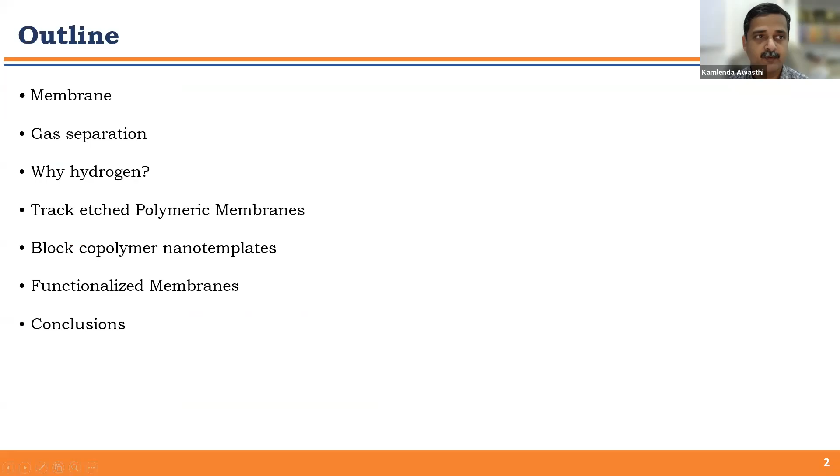So today I'm going to talk about polymer nanofilters. What are the challenges and applications for this, particularly for energy applications in hydrogen?

So if we see our day-to-day life, from morning to evening, for different life applications we are using filters also, like when we are having tea and other things during daytime. But have you thought why we need different filters for different applications? So maybe one common solution is because of the size difference. It means we cannot use a single filter for various applications. So we need some kind of filtration that is based on size.

So what is the size of gases and how we can overcome the challenges? This is just the overview that I'm going to present in this talk.

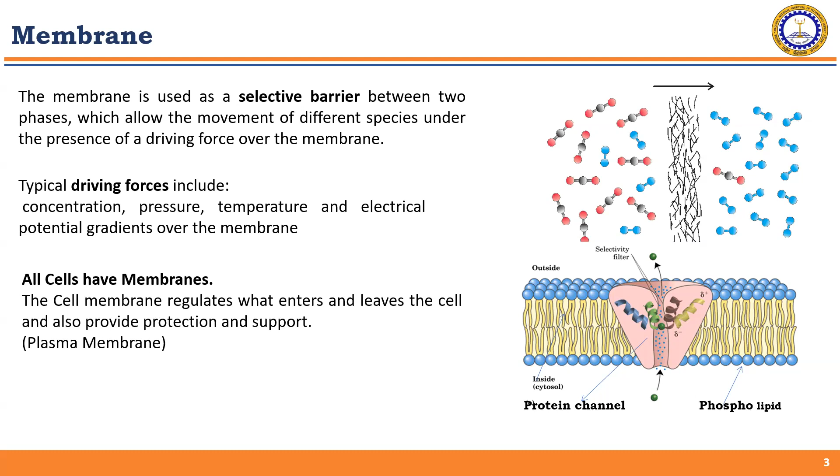So this is the example of protein channels, and these are the phospholipids here. So can we mimic the similar thing in synthetic membranes or in polymer membranes, so that they can allow only one gas to pass through and block another? So the idea is to mimic such properties in the synthetic membrane.

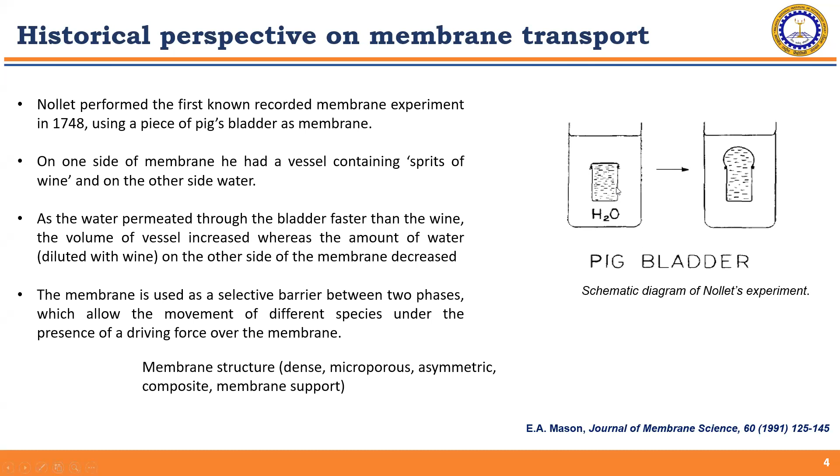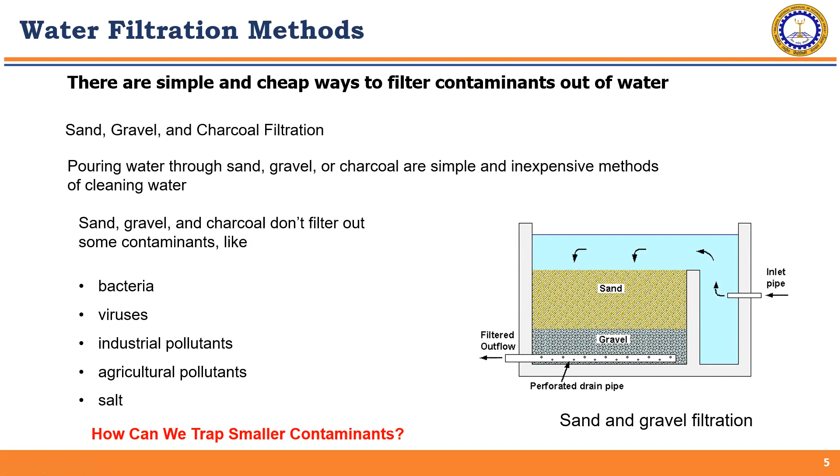This water that is coming out has bacteria, viruses, some pollutants and salt. Why? Because these sands or the gravel are not basically absorbing or selecting particularly this bacteria and virus to flow throughout this permeate water.

So what are the other applications in our daily life? Human skin. We filter hot tea using a mesh filter. There is a filter in a juicer which filters fruit slag. The water you drink is almost certainly filtered to remove more.

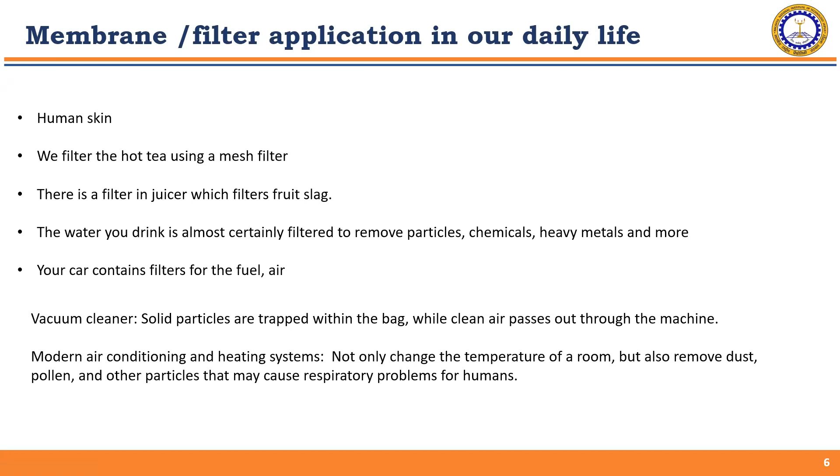And your car contains filters for the fuel and air, and vacuum cleaner. So if you see this filter, it means there is something according to their size, and either we want to have based on size, or we want to go for binding.

So it means there are different types of membranes according to size or according to their nature. Their structure may be dense - dense means there is no porous structure, but they have some internal free volume. There's also microporous membrane, and a layer that is supported on another porous layer. I will discuss this example in my coming slides.

Membrane material we can have from polymers, metals, ceramics, liquid membranes. But today I'm only focusing on polymer. So why polymer, not the others?

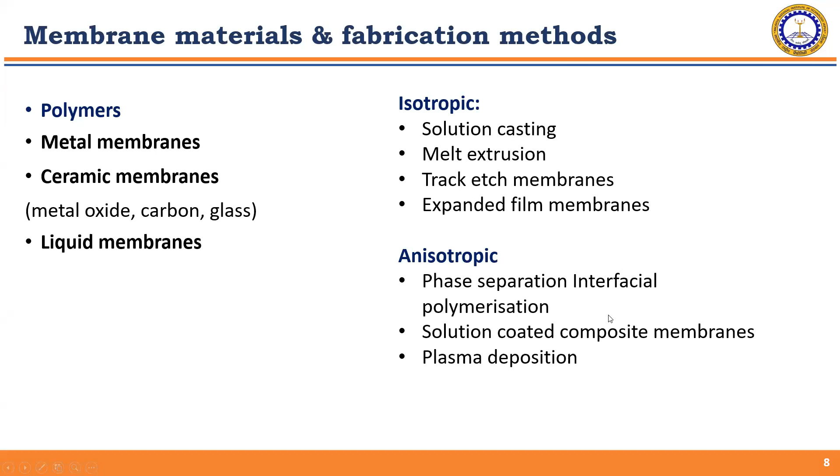Because once we have a membrane from polymer, this is flexible and has some other advantages, but we can certainly modify its properties according to our application. These polymer membranes can be made by isotropic methods, meaning solution casting, and so on, and anisotropic phase separation and other methods. I will discuss all these methods in my coming slides.

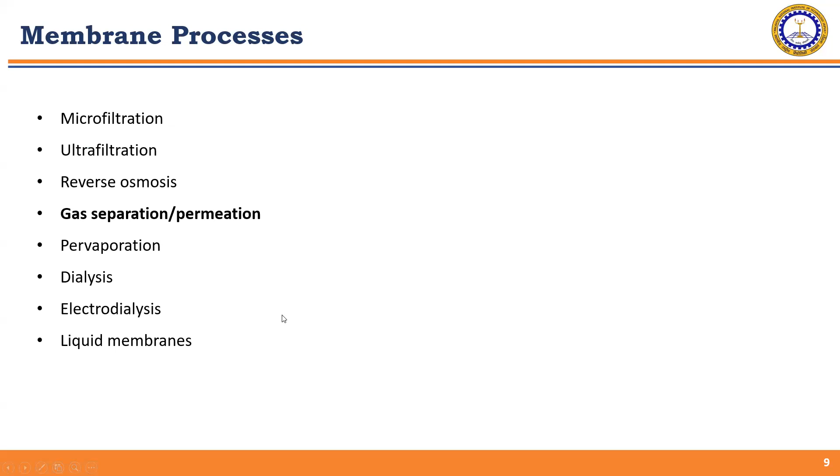And these membranes have various applications like microfiltration, ultrafiltration, RO membrane, gas separation, dialysis, electrodialysis, liquid membrane, and so on. Today I will just cover this gas separation part, not the other applications.

But at the same time, when we are decreasing the porosity, we are going for a narrow pore size distribution, the cost of membrane is increasing. And after a certain time, we have to change the membrane, meaning the life also. So if the porosity is very narrow, there's one problem - the life of the membrane, and second, the cost of the membrane.

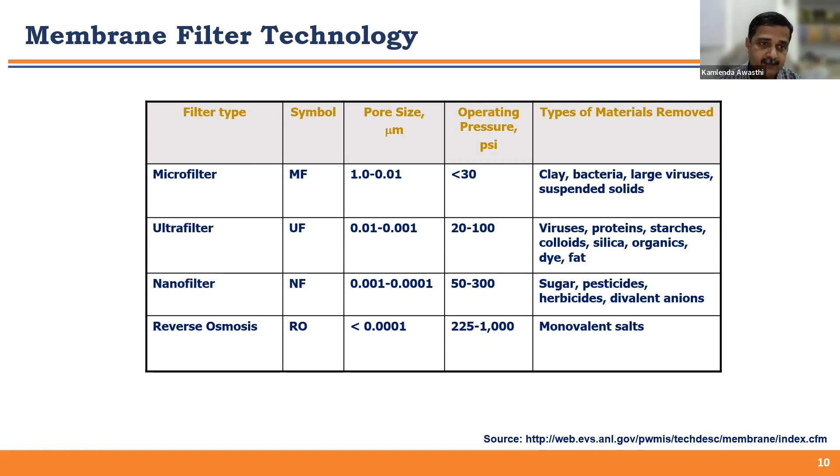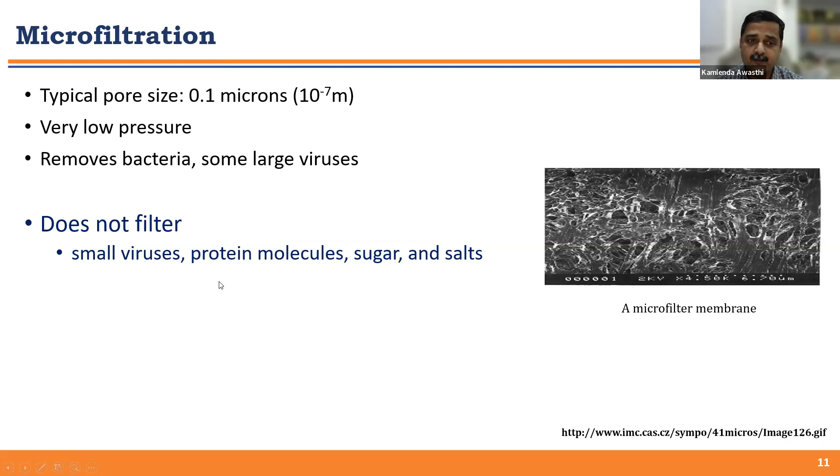Okay, so let's see. In microfiltration, as I discussed, the pore size is near about 0.1 micron. It needs very low pressure, but it can remove bacteria and large virus. But for small viruses and protein molecules, we need to go for this ultrafiltration membrane, where the porosity is near about 0.01 micron. But again, it does not filter ionic particles, lead, iron, and so on.

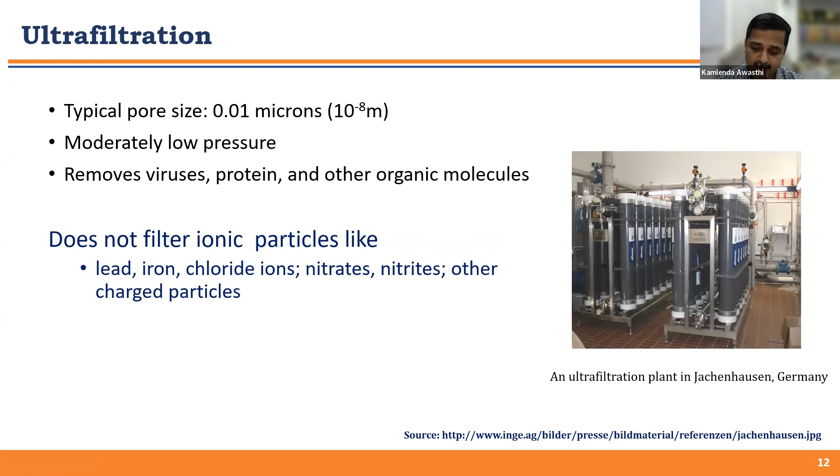So we need another kind of membrane. Then we come to this nanofilter, which almost removes the toxic or unwanted iron or lead, whatever is not possible with ultrafiltration. But the salt or the monovalent ions cannot be filtered by nanofiltration. Then we need, of course, this RO membrane that we typically use in our home for getting this water.

So here the pore size is very small, 10 to the power minus 10 meter or 0.0001 micron. If you can see, generally after 6 months or 1 month, we need to change this filter. And of course, it needs very high pressure when we are operating with this membrane.

So how can we keep large particles from fouling a membrane with small pores? This is one challenge - how can we do this? One possibility is we can use a series of membranes, so that larger particles can be filtered out at one level, and second and third and so on.

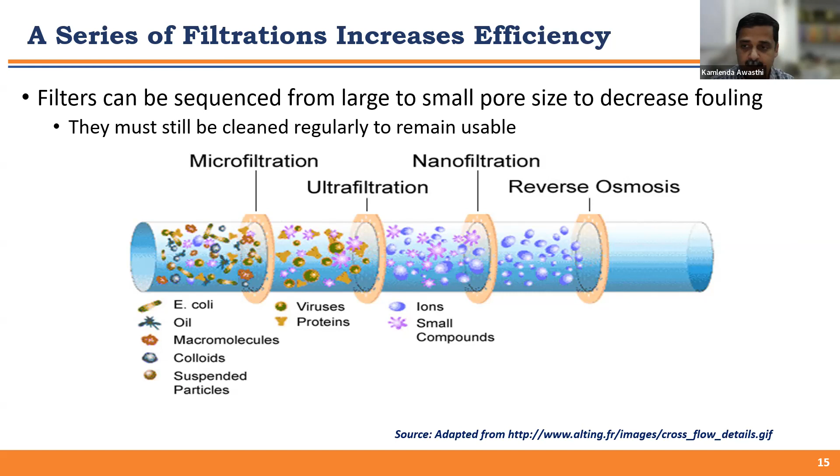But again, the size of your module and the cost of module, this is again very high. So this is not a good idea to use all membranes in a series.

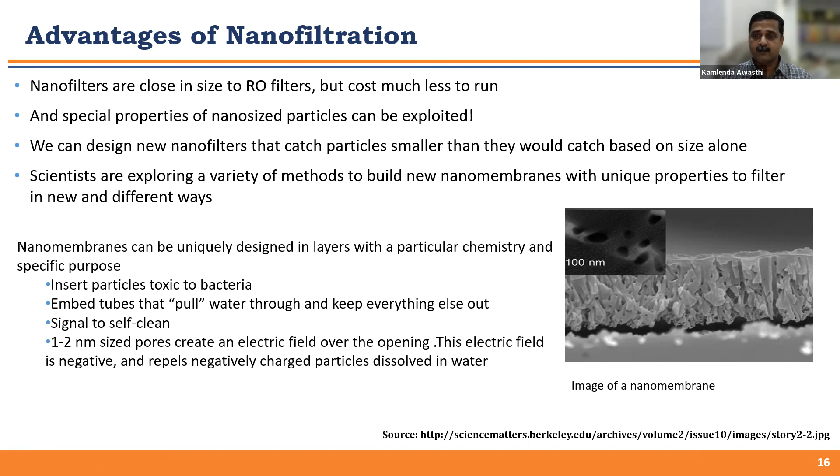Okay, so this is another example of what we can do in nanofiltration. Nano membrane means 10 to the power minus 9. They are very close to RO membranes but have less cost. So what we can do is decorate these channels with other particles, meaning we can design a new nanofilter membrane so that it can catch particles, or we can insert particles into this membrane that are toxic to bacteria. So here it gives an idea: can we make a nanocomposite membrane so that it has similar properties as RO?

Okay, so now today I'm going to talk about gas separation. Why this gas separation? In particular, we need hydrogen and nitrogen separation, basically in ammonia plants, hydrocarbon separation in petrochemical applications, CO2 and water removal from natural gases, and organic vapor removal from air and nitrogen streams.

So we are using polymers for gas separation because they have low investment, low weight, flexibility, low cost, and high surface area. And those cars that run on hydrogen fuel emit water, so again, no pollution.

So why are we interested in hydrogen? Because membranes may be useful for purifying hydrogen due to their low capital cost, compact size, and easy operation. And in fuel cells, there is one component that has this impurity in hydrogen. So how do we get pure hydrogen for this fuel cell application?

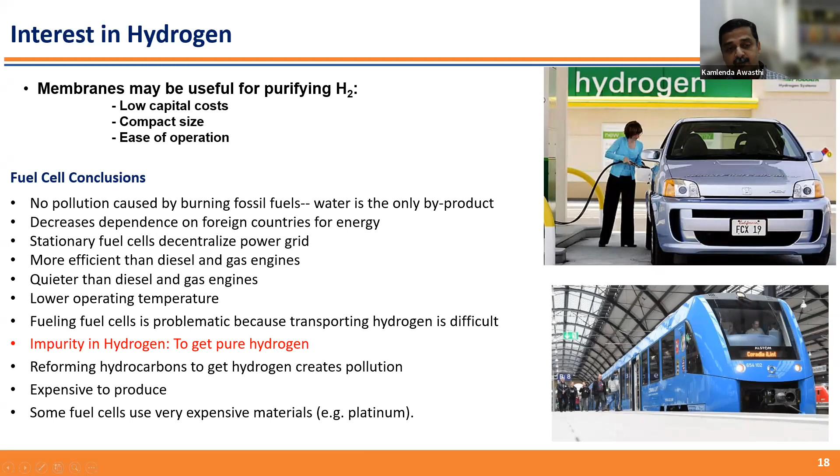But at the same time, if you see the kinetic diameter of the gases: hydrogen 0.28 nanometer, CO2 0.33 nanometer, nitrogen 0.36 nanometer. Their kinetic diameters are very close to each other. So we cannot make a filter of, say, 0.289 nanometers so that only hydrogen can pass and others are blocked, because whatever I'm talking about right now is basically in the range of nanometers. So suppose I say 50 nanometers, 60 nanometers, 70 nanometers, you'll see every gas passes through comfortably. So how do we make a selective nanofilter so that we can separate these gases?

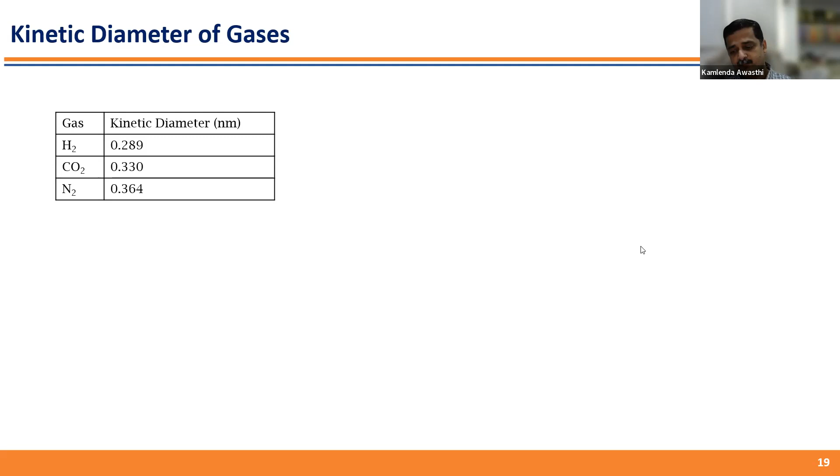So certainly we can make polymer composites and other membranes. When we talk about a membrane, an ideal membrane should have high flux in terms of high permeability, should be thin, have high selectivity, be mechanically stable, and should be reproducible when we talk about industrial scale, and of course it should have low cost.

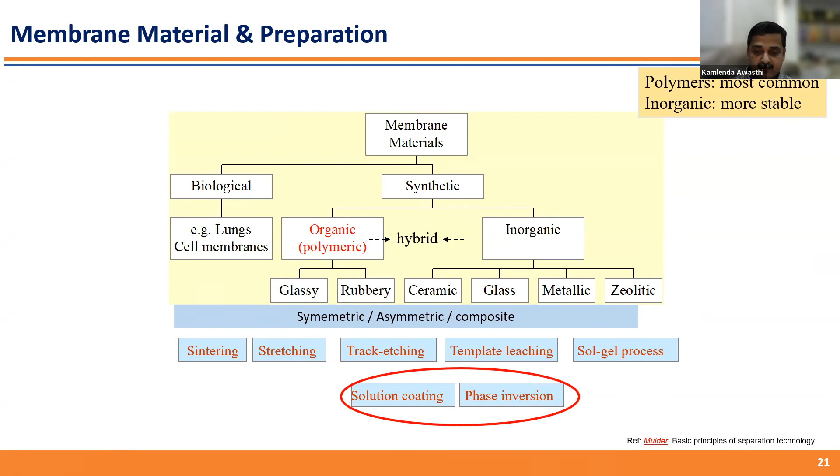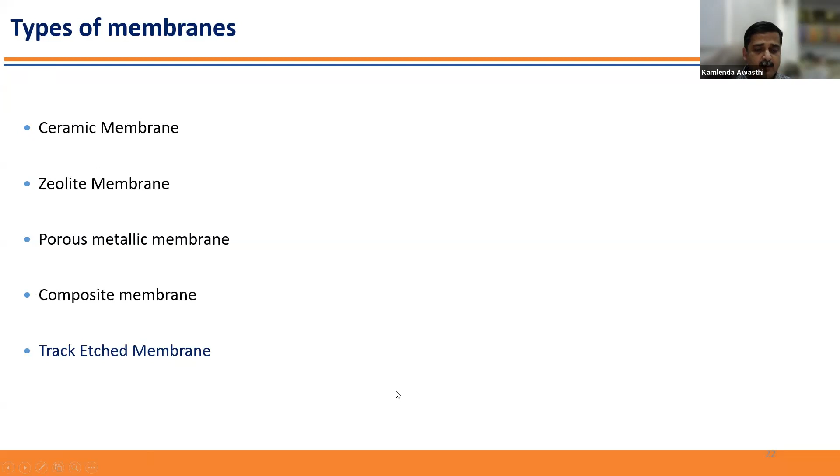So at last, solution coating and phase inversion are two popular techniques being used for making membranes. Again, based on the material, we can use ceramic, zeolite, porous metallic, or composite. But here I'm talking about track-etched membranes because here you have freedom to choose the porosity and pore size. These are the membrane preparation techniques: stretching, track etching, template, sol gel, phase inversion, and coating. And of course, further we can have some modification or engineering in any of these membranes.

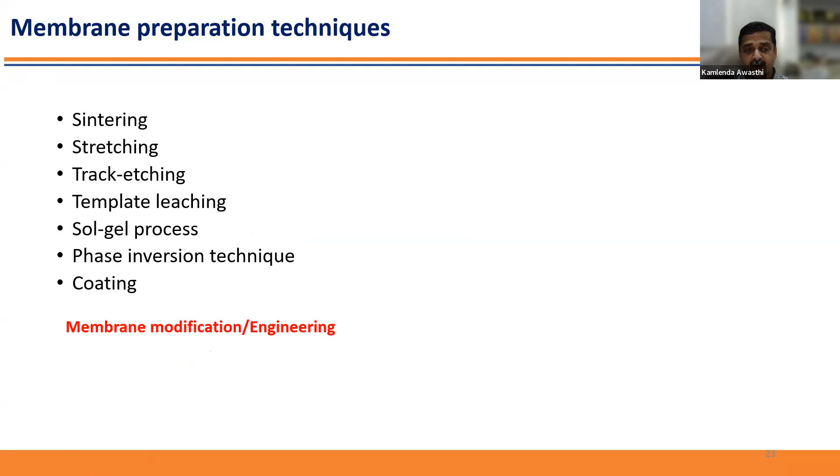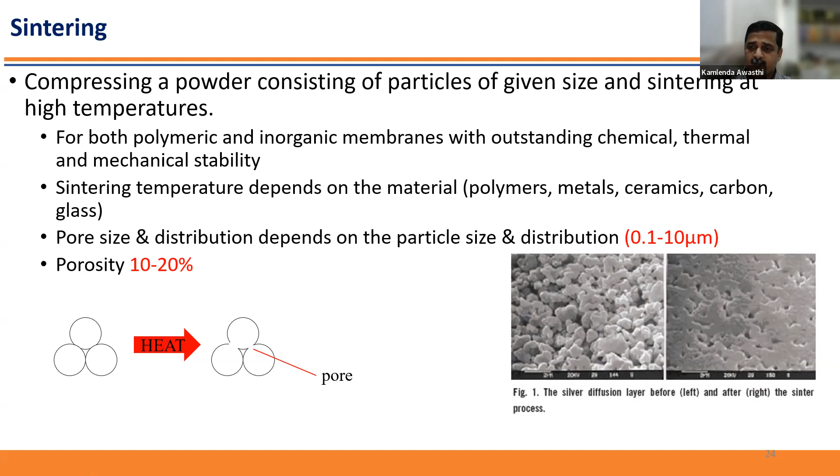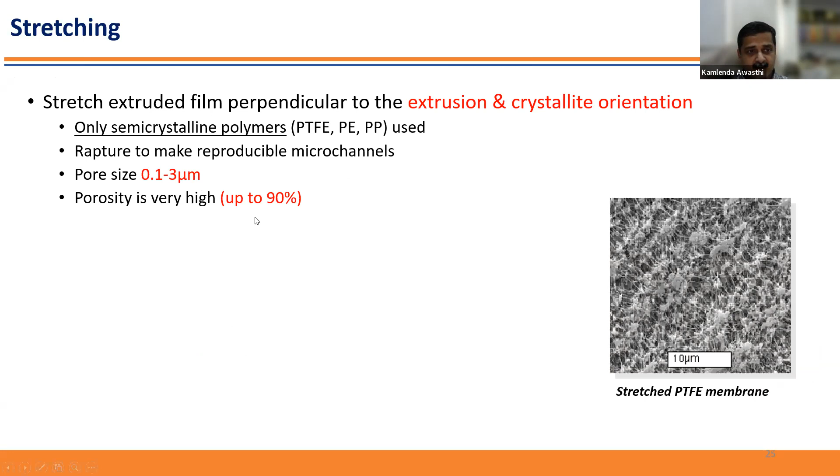Porosity is very high because pore size is very large here, so the phase inversion technique can also be used to make this asymmetric membrane. Here we have a solution of polymer in a poor solvent prepared at high temperature, and when we transform into the final phase, there is a sudden drop in temperature so that the polymer precipitates, and then the solvent passes out. This is basically simple, but again, there are some constraints in using this phase inversion technique, such as precipitation by solvent from vapor phase and so on, and we can have immersion precipitation.

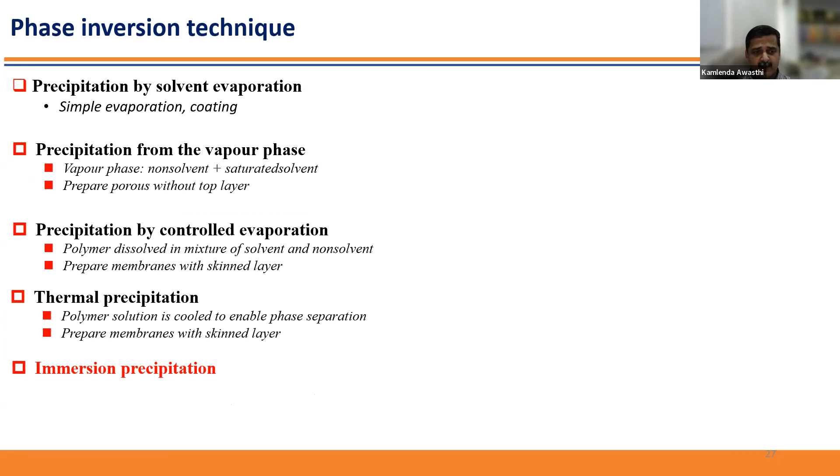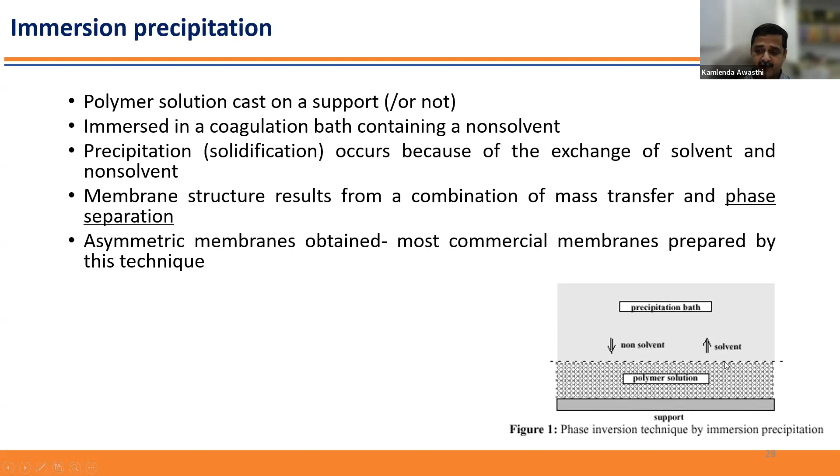So here you can see we can have support, and this is polymer solution. We can have non-solvent and solvent, and finally one can evaporate, and you get this membrane out. So this is a simple way that you can prepare your membrane.

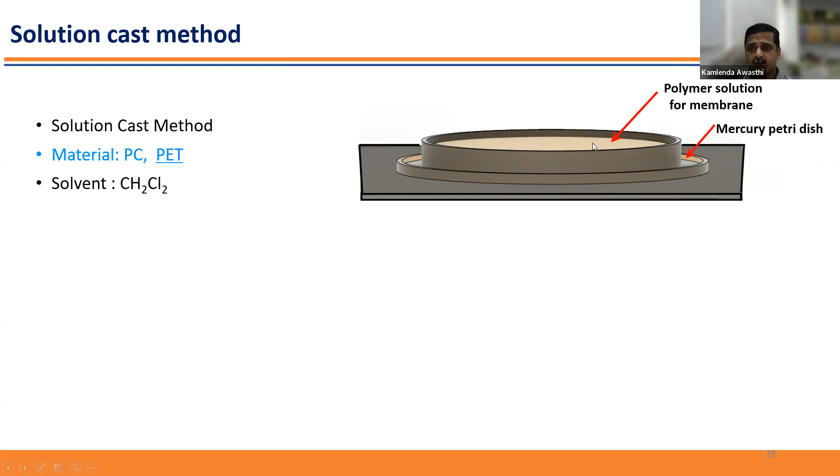You can have a bath where you can have a uniform height, and this is the petri dish. Here you can pour your solution, and later on the solvent evaporates, and finally you can peel off your membrane and get it.

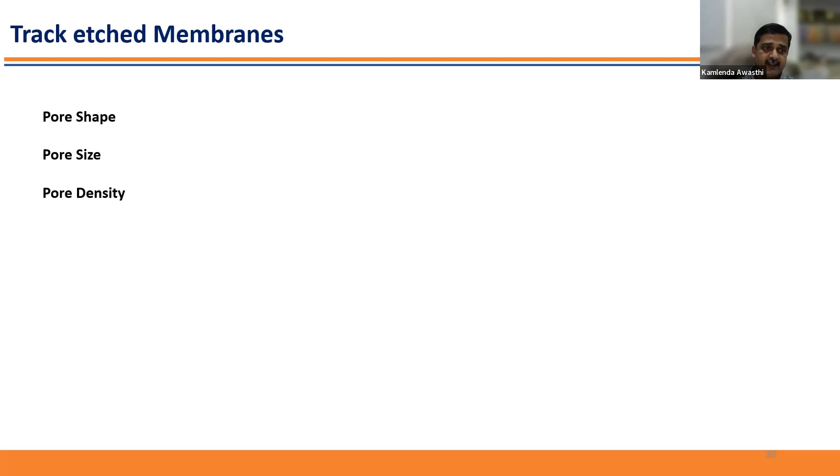So let's talk about track-etched membranes, why we are preferring them, because pore shape, size, and density can be tuned, and this modification is done by heavy ion irradiation so that we can make the damage. This is how we make a membrane.

So the polymer is like a multiple chain-like structure. What happens if you have an ion beam passing through this channel? You can see mostly the chains break. This phenomenon is called chain scissioning, and once they join each other, it is called cross-linking.

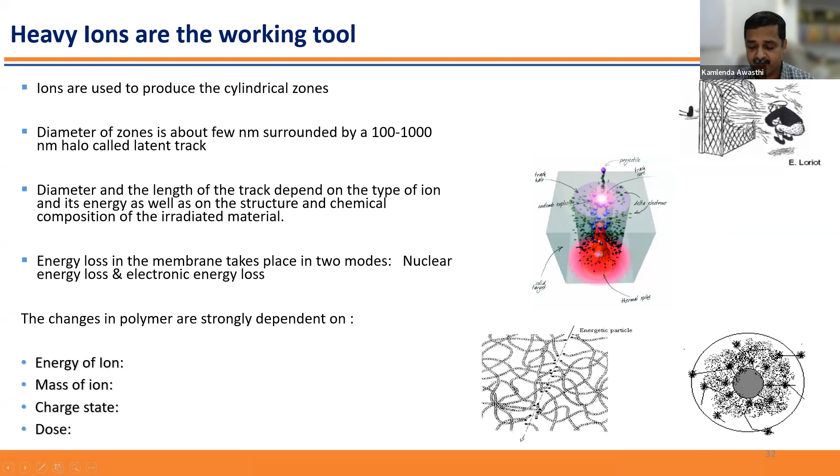So what is happening here, you can see the dark part here. This is the path of your beam, and this is the damage created along the track, and this material is basically loosely bound along this track, and you can remove it chemically, making them cylindrical or conical depending on the size.

Here you can see what is happening when this ion beam is coming through your sample. This is the path of the ion beam, and later on the damage that it has created can be removed chemically. So here you get your porous membrane channels.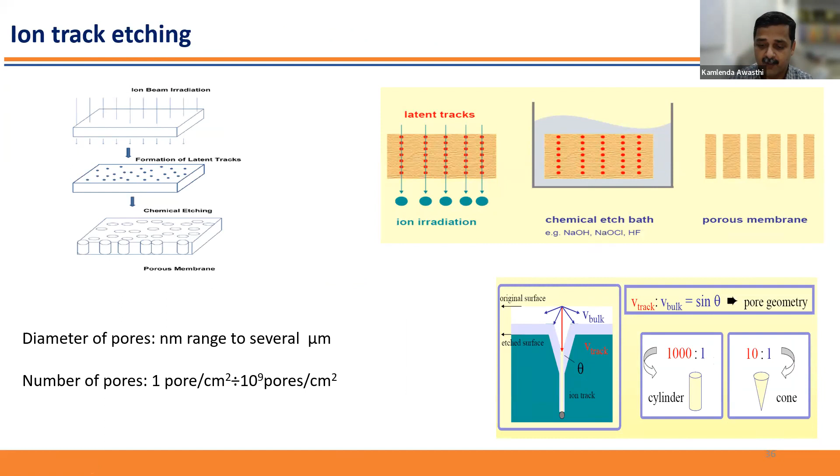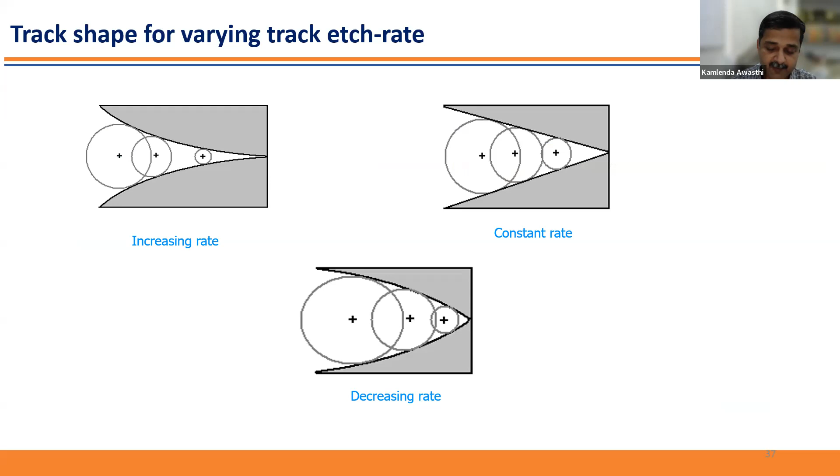But if you etch from one side and stop the other side, you could get the conical shape, not the cylindrical. So you can have various shapes and sizes by changing the parameters or the rate of chemical etching. This way you can make different shapes in polymer nanofilters.

And here you can see the SEM images, this is the top view. This is 10 to the power 8 ions per centimeter square. Here you can see some pores overlapping with each other.

And this is the cross-sectional view. You can see your pore is through and through, and this is the cross-sectional view for a single pore. So you can see this porosity is the same throughout this polymer.

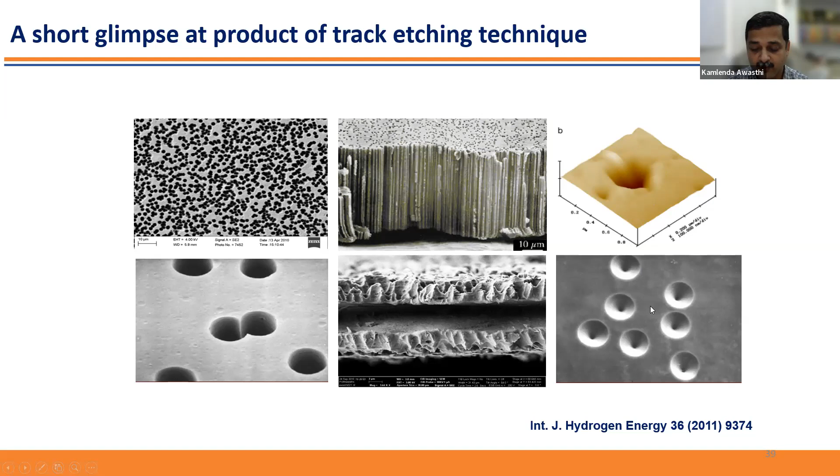And once you etch from one side, you get this cone-like structure in your polymer. So how do we make this cone-like structure, and why are we interested in the cone shape?

If you etch from one side and stop from the other side, this is your current and voltage signal. Here you can see it is almost zero, meaning these both chambers are not connected to each other. Once the current suddenly increases, it means they are connected, and you should stop somewhere here.

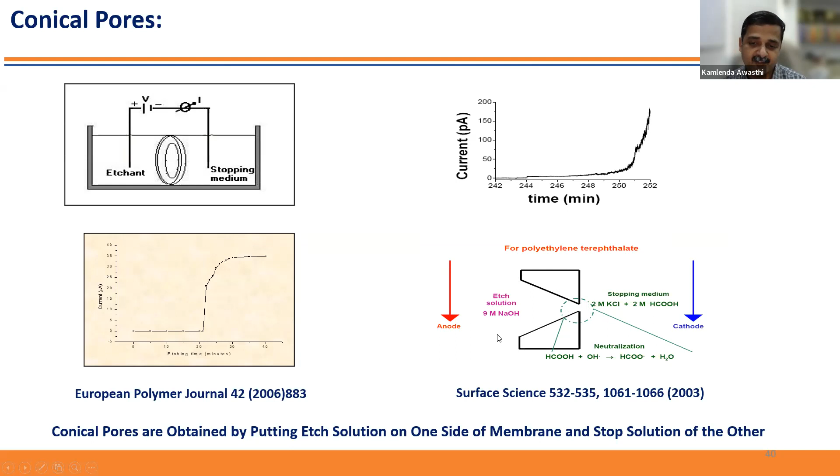So this face is basically in contact with this etching solution. Of course, it is like a cone-like structure, and once they are connected, you stop here, so this is a very small opening. On the left hand side, the opening structure is around a few microns, but on the other side, it is a few nanometers.

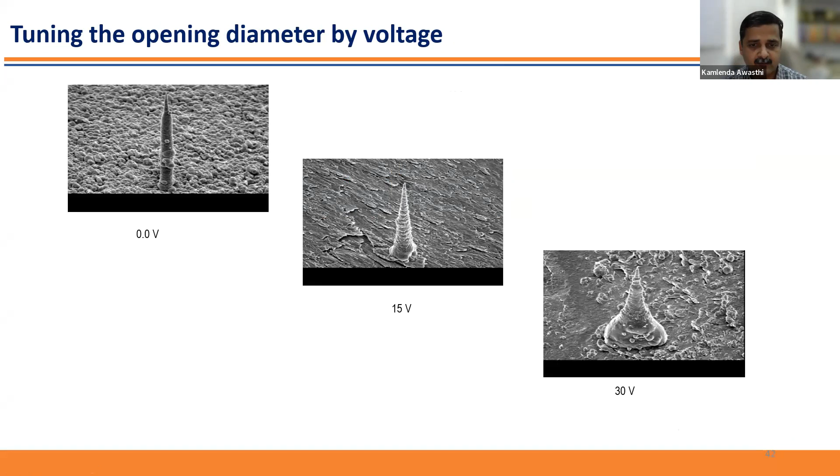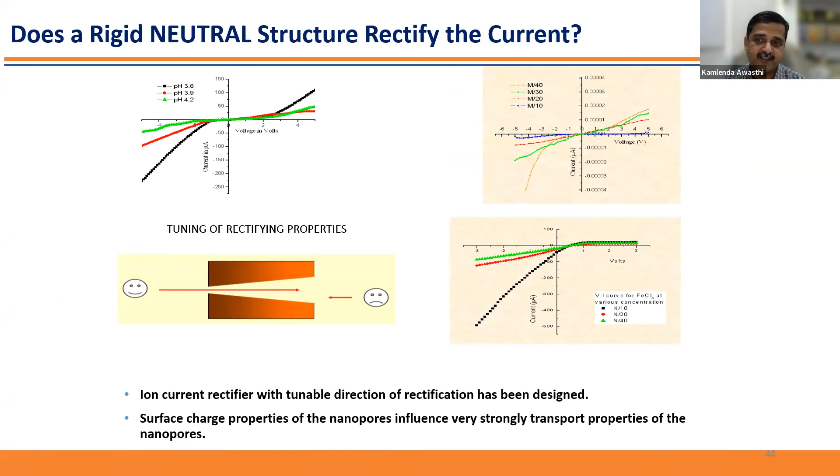So we can tune the various shapes and sizes by voltage also. And this is one interesting phenomenon: being a polymer neutral, it shows a diode-like behavior in this membrane. This is because of various groups, like carboxylic groups, present along the pore wall. So this is one reason to have this rectification.

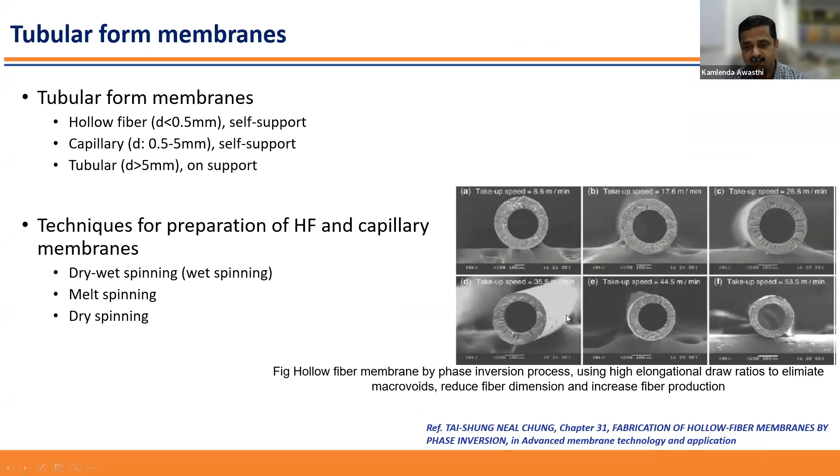Next, there are tubular forms of membranes. These are hollow fiber membranes, and they can be made by dry-wet spinning, melt spinning, and dry spinning. So we can make such membranes also for various applications.

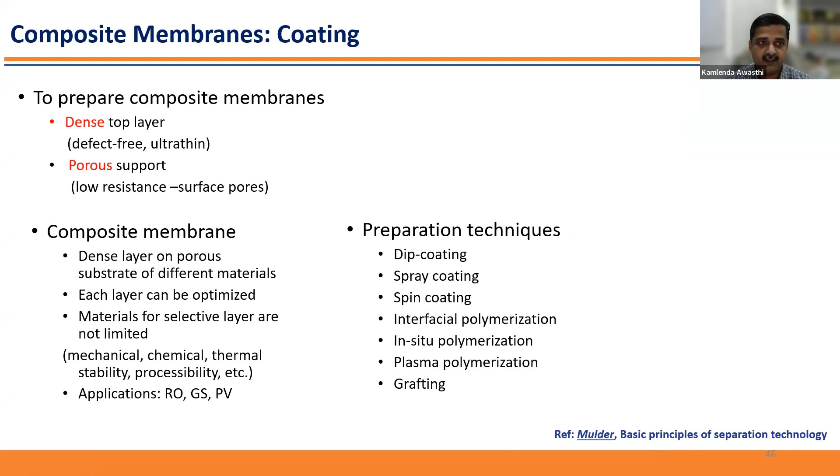We can make composite membranes by coating a dense layer over a porous support, using dip coating and spin coating. Here you can see this dip coater. You can put your fixed membrane here and just dip it in a solution.

So dipping speed, dipping time, and the lifting speed basically decide the thickness of the coating on your membrane. Here you can see this is the porous support, this is some non-woven support, and this is the top layer that you have coated over it.

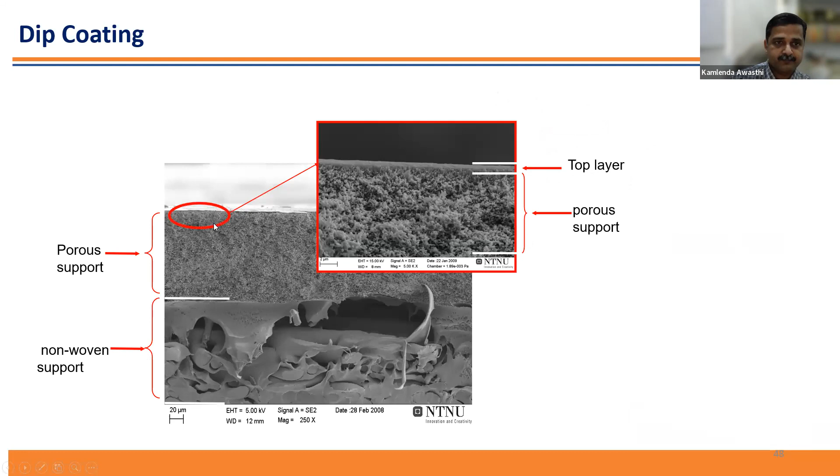This can be used for pore penetration, and to avoid this pore penetration, there are pre-filling and some other approaches that can be worked into your membrane.

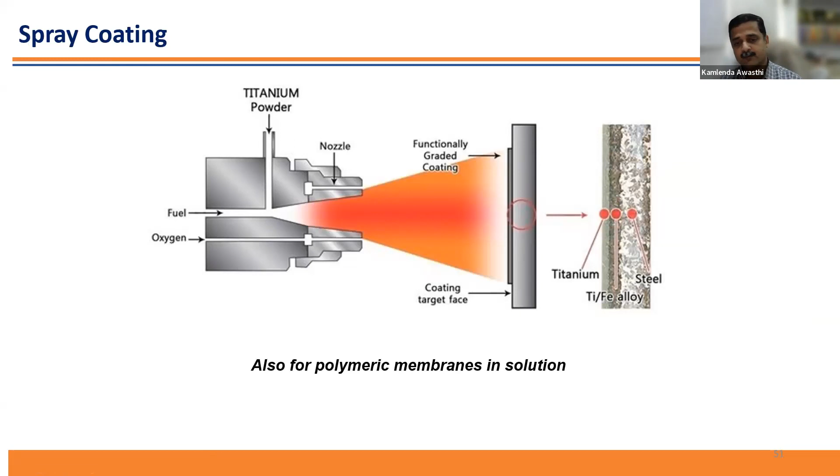Another technique is spray coating. You can use this technique to coat your target like this. Here you can see this is the selective coating on the surface, which can also be used for making a thin selective layer, either on dense or any porous support.

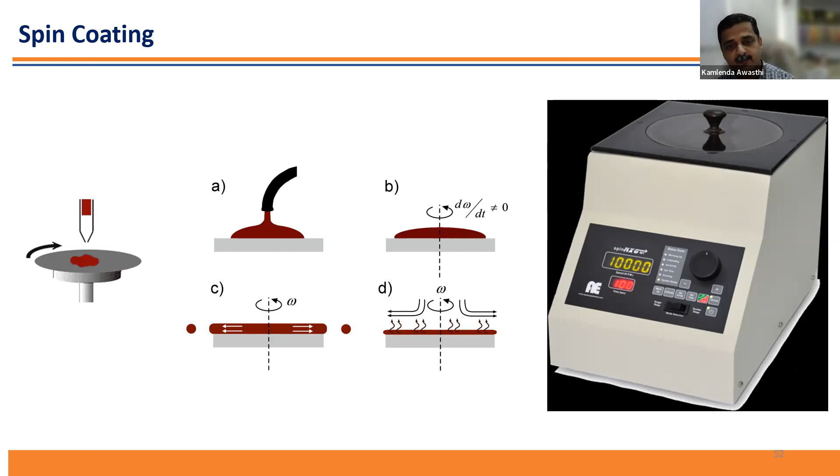This is an example of spin coating. You pour your solution here, and you can have different speeds in terms of RPM, so you can control the thickness. At higher RPM, there is a chance the thickness of your deposited layer may be around a few nanometers, but at low RPM, you can deposit in micrometer thickness as well.

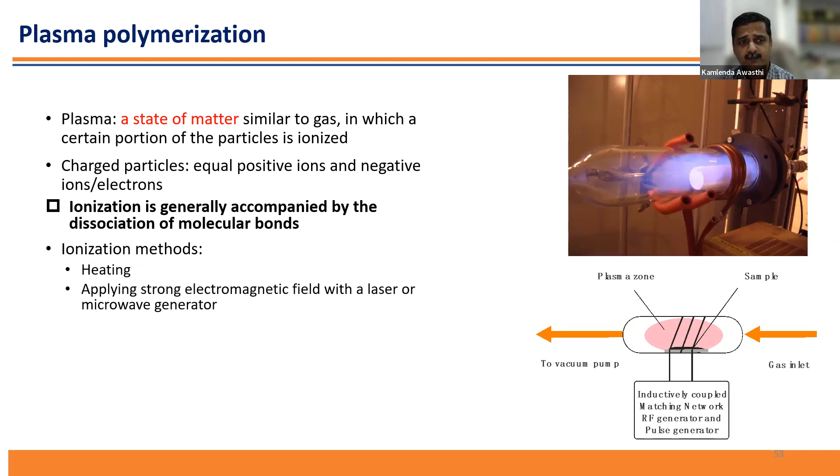Another possibility is to use plasma polymerization to make this membrane, where we perform ionization by the dissociation of molecular bonds.

One final possibility, in the case of dense membranes, is to make them composite. For example, we have used multi-wall carbon nanotubes here. If you mix them randomly, they mix like this.

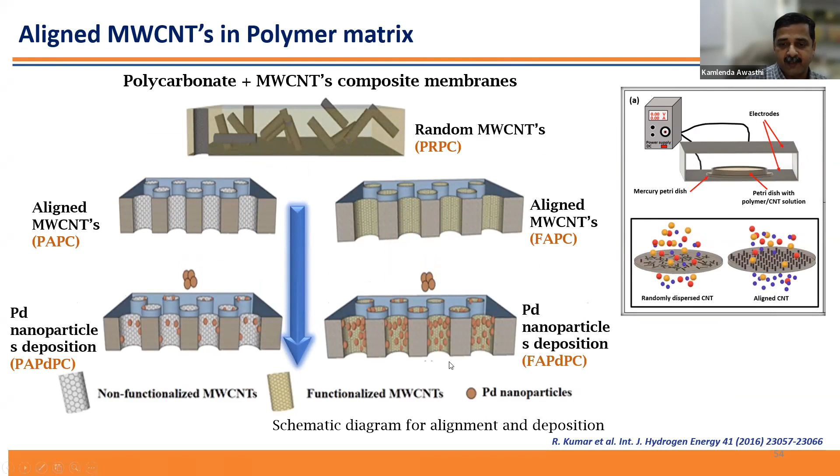But if you use some field, like an electric field, we tried to align them in a perpendicular orientation in solution. On the right hand side, you can see a petri dish placed in this field, so the nanotubes become aligned perpendicular to the membrane.

This is some primary measurement confirming that carbon nanotubes are present. Then we used palladium nanoparticle synthesis, incorporating these palladium nanoparticles into the CNTs, which gave us very good absorption of hydrogen while letting other gases pass through.

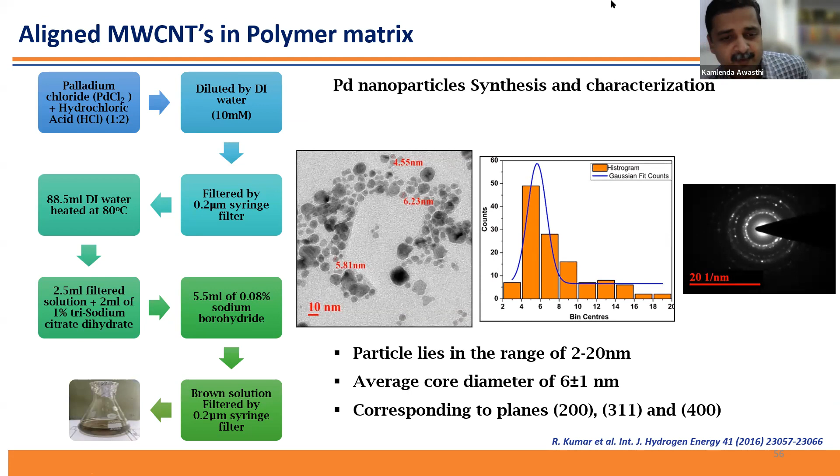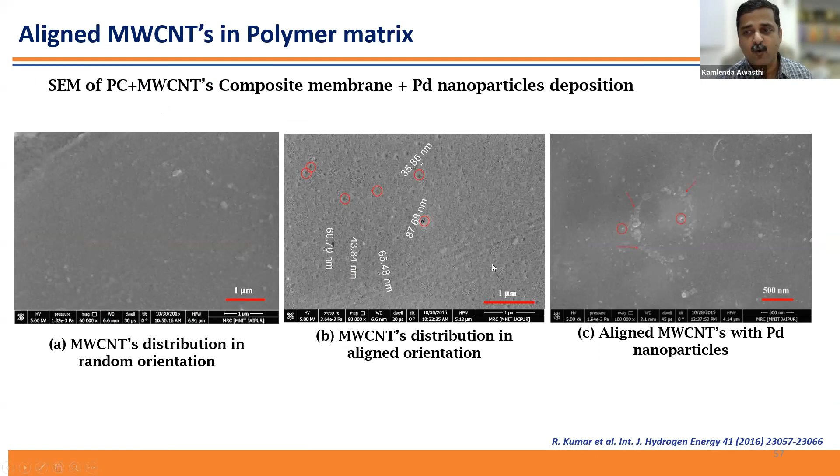So this way we can make a selective membrane using this nano composite. Here you can see these pits marked in a circle, which are basically the openings of the nanotubes over the surface.

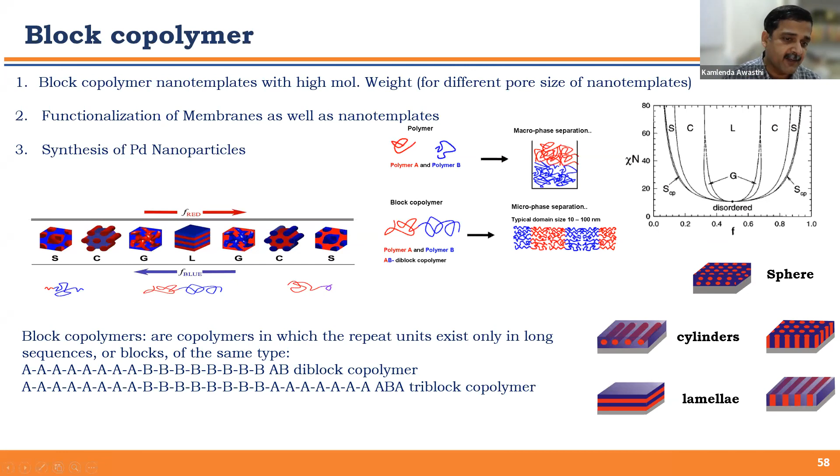Here we do not need any kind of ion beam or other treatment to make them porous. We use this PS-P4VP, polystyrene based membrane.

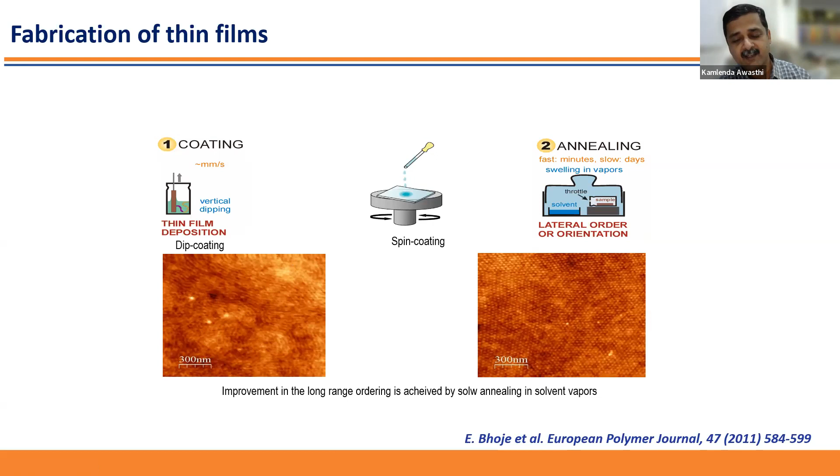Simply by using spin coating, then solvent annealing, what happens is the other component of the polymer can be washed out. Here you can see there are two polymers, A and B.

Polymer A is represented by red and B by blue. What happens is this red polymer A reacts with the additive, and later on we can remove this additive using ethanol, methanol, and so on.

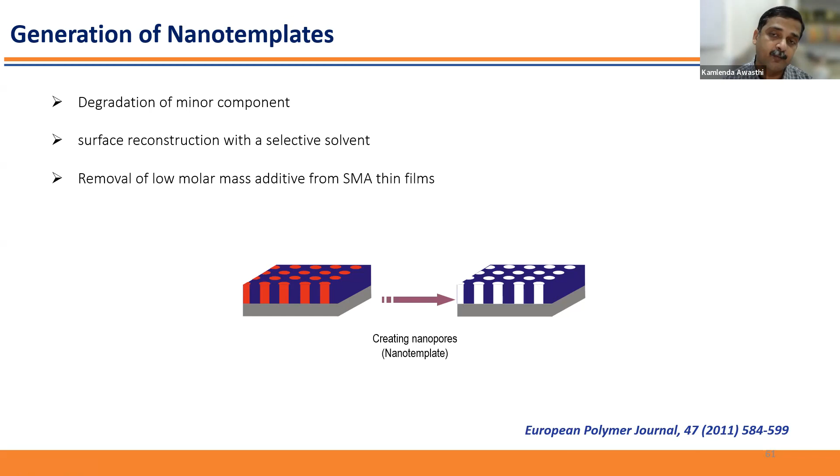So this part goes away, and the white area denotes the porous channel that is available, an ordered porous channel. So we can maintain the ordering, and also maintain the porosity, by changing different molecular weights.

Once we remove the other component additive, then we cannot switch. So as I told, for our interest, this is a well-ordered array of hexagonally arranged block copolymer nano templates.

So they can be used for a selective membrane for gas and other applications, but the problem is these block of polymers are very expensive, and the thickness on any substrate is around few nanometers. So if we are making a self-supported membrane from block copolymer, this is very costly, and if we go very thin, it does not have mechanical strength for such operations.

Another interesting part is conjugate polymers that can also be used for gas separation. Basically they are the conducting polymers, and you can apply some biasing so that there is opening of certain chains, and this way you can have a selective separation for particular gases.

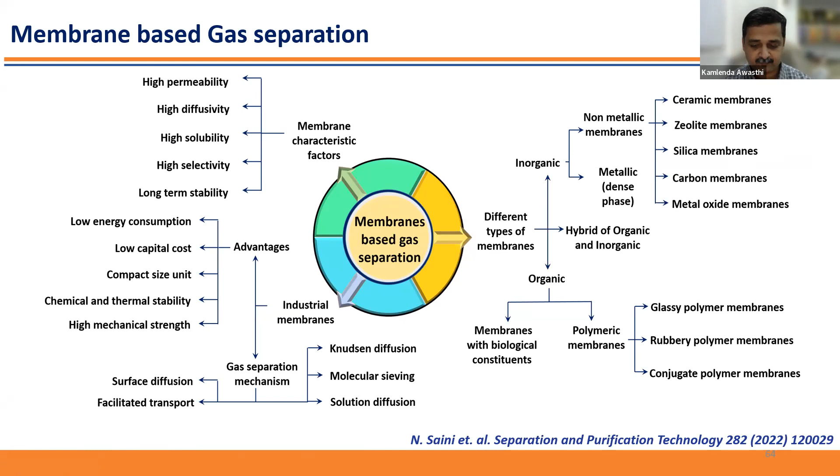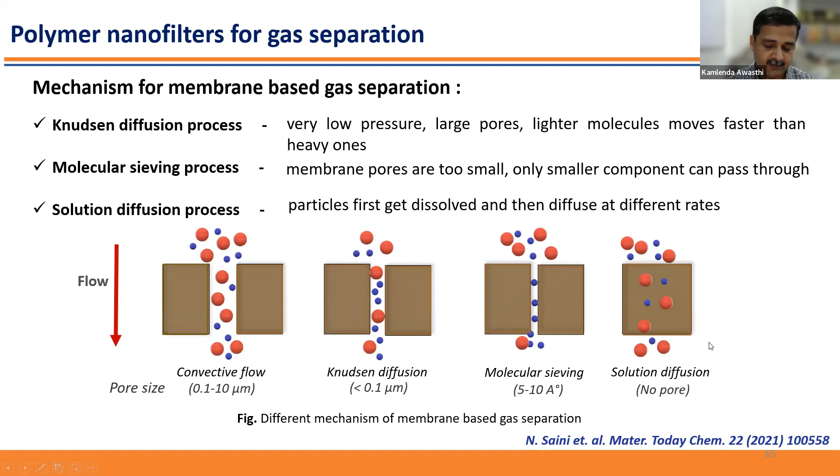So what is happening here - there is no pore, but this gas is being absorbed at the high pressure side and then dissolves out at the lower pressure side because of this pressure gradient. So this is a schematic diagram for any gas permeability or gas separation setup.

So here we use this polymer membrane, and here we apply higher pressure. This is the downstream pressure that comes to the flow meter, and this way we can calculate what is the flux coming out of this membrane.

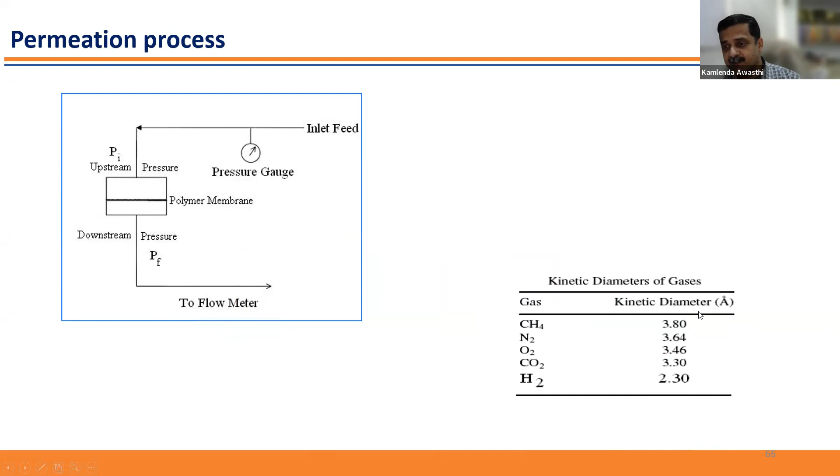Again, please remember this kinetic diameter - here we've written it in angstrom order. So you can see, apart from hydrogen, these are all very close to each other. So what are the ways we can separate them? These are the gas permeability setups available in our lab here at MNIT Jaipur.

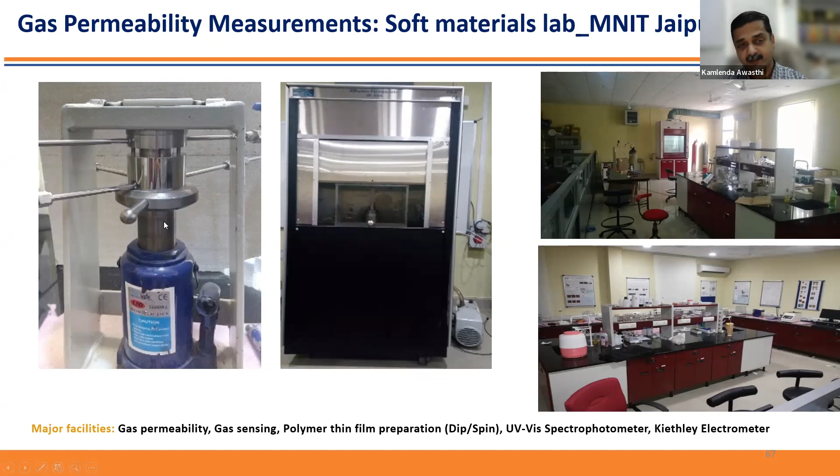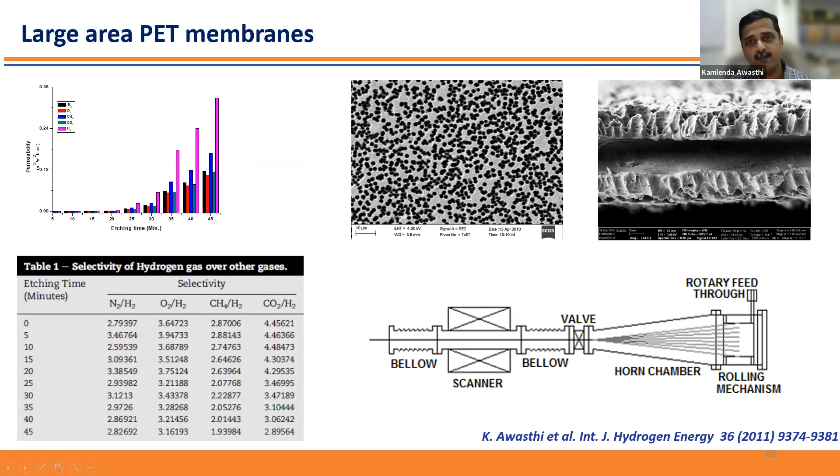Another thing we can do is use this block copolymer nano template. So here we have this porous membrane and try to cover it.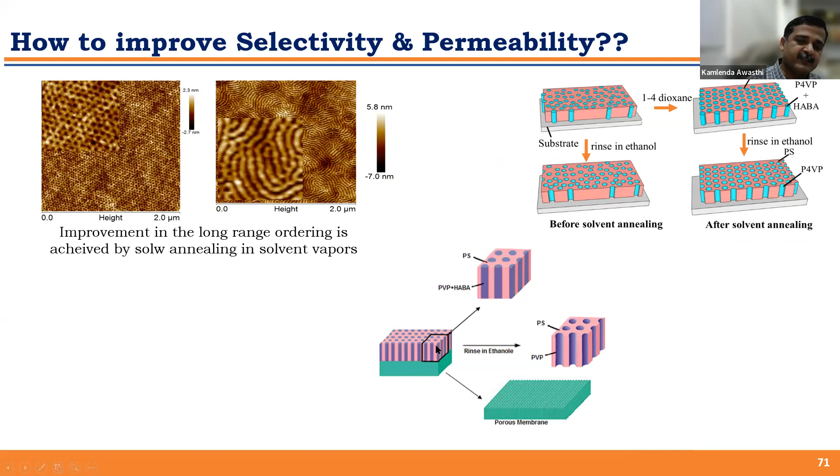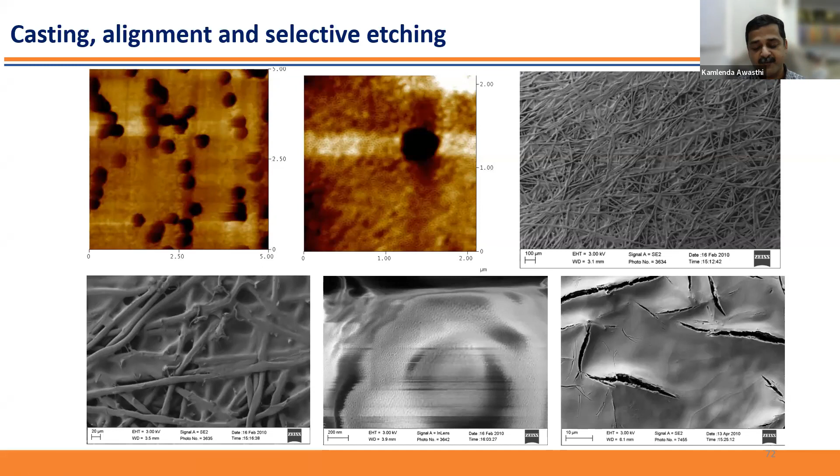having a low concentration solution. We try to spread them and then check the porosity of this. You can see the support membrane - these pores are not completely covered by the upper layer of block copolymer membrane. Once we tried with a higher concentration of this block copolymer, you can see there are cracks in the surface. So we have to optimize what concentration is needed of this block copolymer template to cover the support membrane. Finally, we could optimize the parameters.

Here you can see we try to cover this nano template support membrane by using this block copolymer template. This is the support layer having 0.1 micron porosity, and here the support is 0.2. So here what you can figure out is that the supporting membrane has higher porosity as well as mechanical strength, this block copolymer. So the upper layer basically helps us get a more controlled way to diffuse the gases in these nano channels, and the supporting layer basically provides mechanical strength.

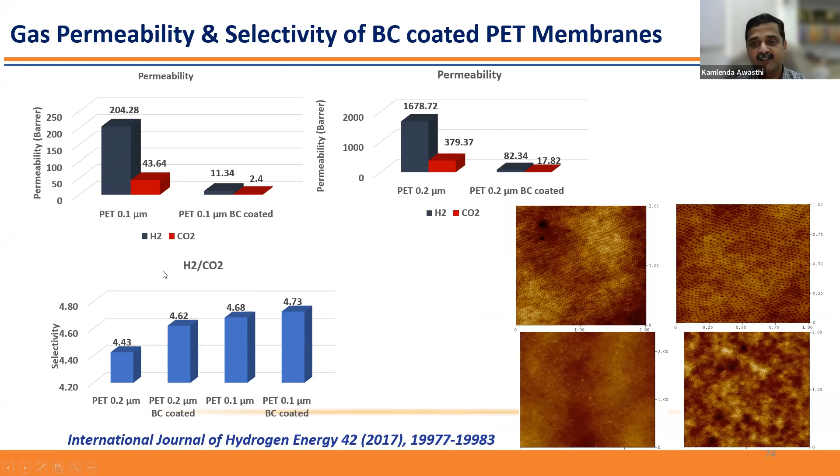What is happening here, because of this narrow size pore distribution, our permeability drastically goes down. So earlier it has 204, and here it's 11, 43, and 2.4. So basically this membrane is behaving just like a dense membrane.

Okay, so what we can do, once we prepare the channel and do the etching, we prepare this nano template. So how further can we improve it? This is another possibility we found - this is a very good way to functionalize them and deposit nanomaterials that are gas sensitive.

So here you can see this is the channel that is already created. Suppose here, if I'm talking about this micrometer size membrane, this channel has a micrometer size, and you functionalize them, then you can put your gas sensitive nanoparticle inside this channel. So what will happen is the active diameter of the channel reduces, and at the same time more gas can diffuse within this nanomaterial. This may help get better selectivity.

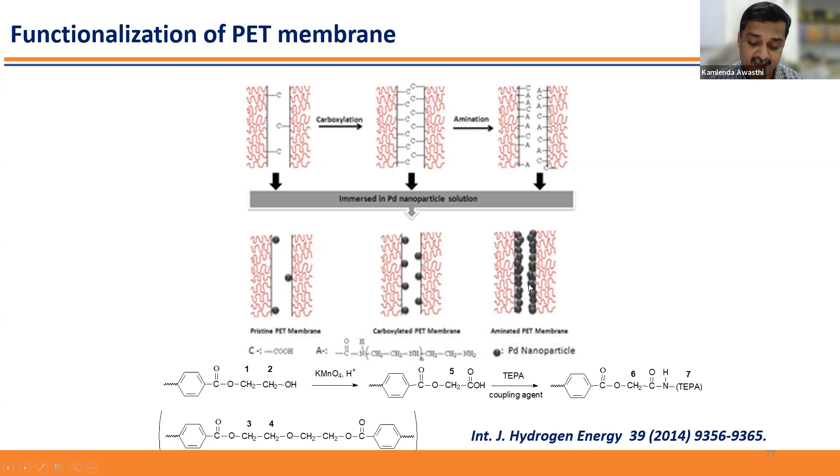So in pristine PET membrane, there are few carboxylic groups, so attachment is very limited. But when we further carboxylated it, there's more attachment of this palladium nanoparticle, and with amine you can see a lot more, because it has more ability to attract these palladium nanoparticles.

So what is happening here? Most of this hydrogen is being absorbed within these palladium nanoparticles. So permeability goes down, but at the same time the selectivity improves, because it is not affecting the permeability of carbon dioxide. So this way we are getting good selectivity of gases in the aminated membrane.

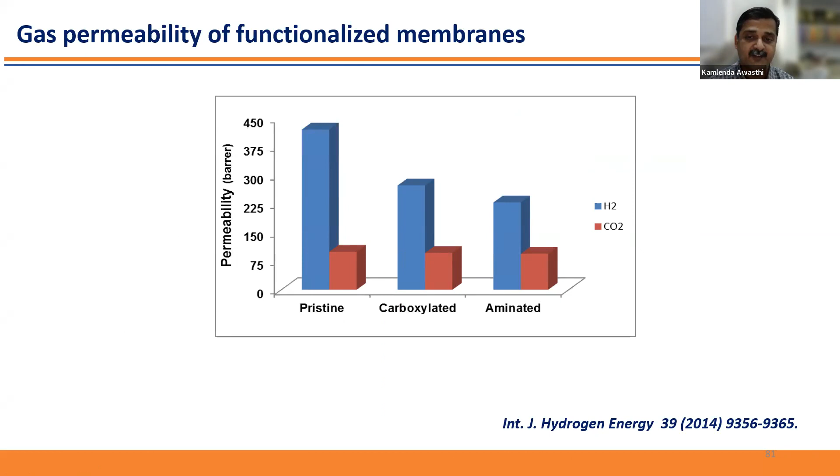We tried a similar approach with our carbon nanotubes also. We functionalized these carbon nanotubes, then deposited the palladium nanoparticle in the CNTs, and then aligned them in a polymer matrix. So such membranes are also useful to have better selectivity.

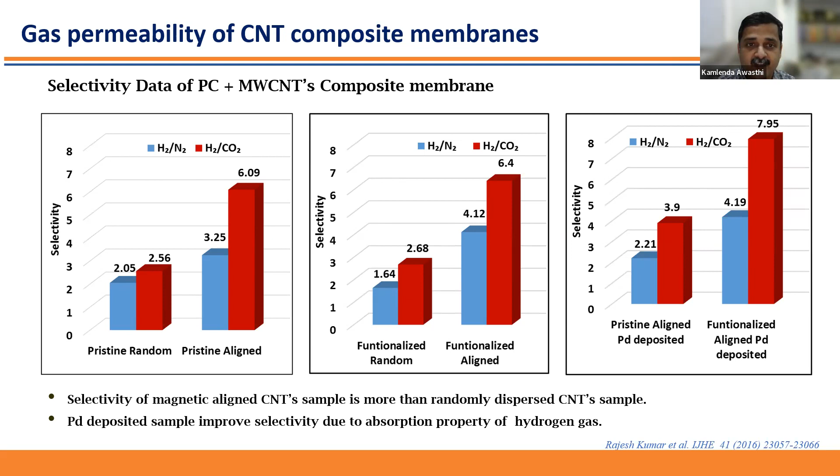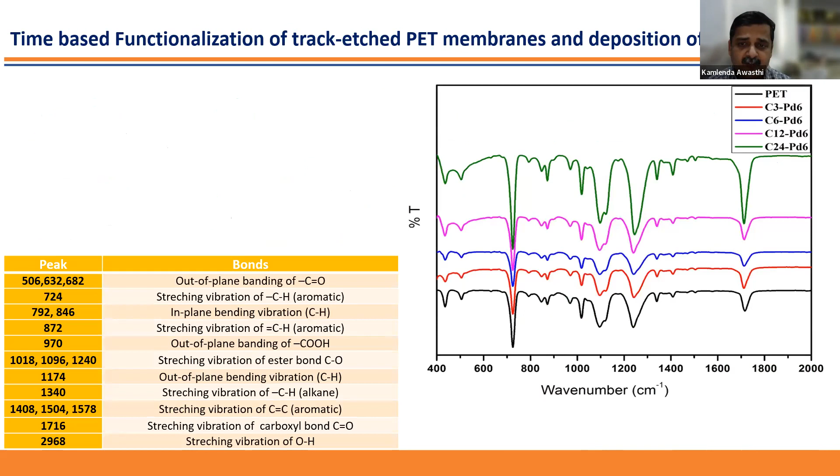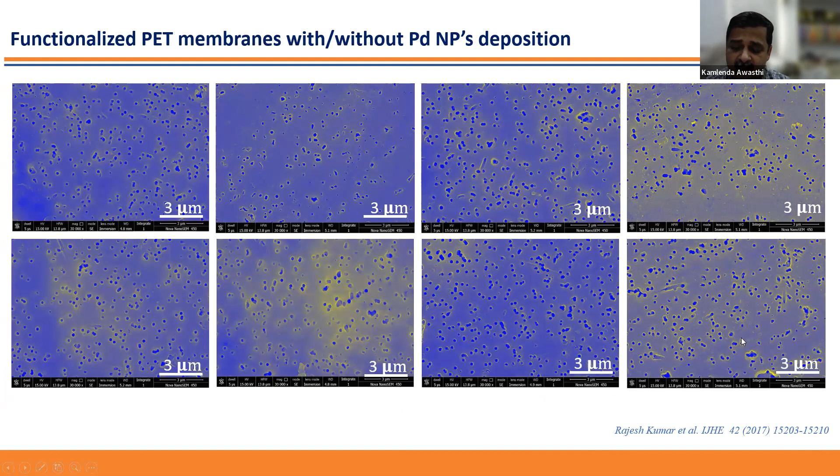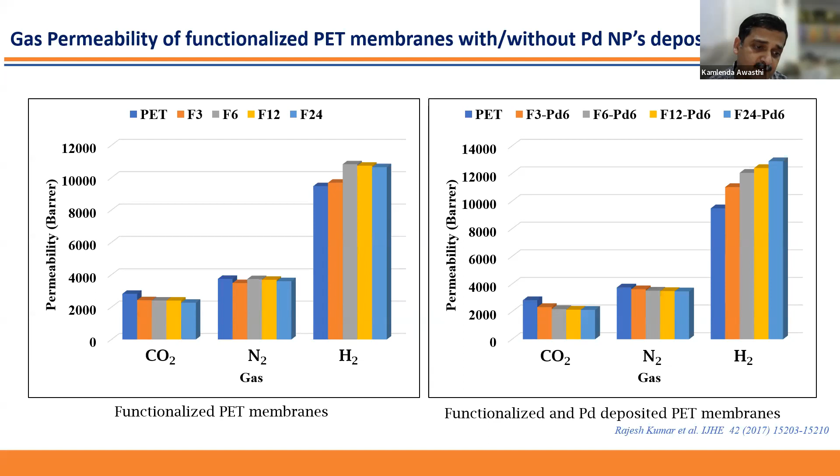So we tried to increase this, because earlier we did the random functionalization. We tried for different durations up to 24 hours, and here you can see the results for different timing. As we increase the time, you can see more palladium nanoparticles depositing over the surface, shown by the increasing brightness. So the attachment of this palladium nanoparticle in the functionalized membrane helps us control the selectivity of the gases.

Here you can see, earlier in the pristine membrane, the selectivity - meaning the ability to pass a particular gas - was around 2.53, and we were able to address that up to 3.72, and here from 3.3 to 6.05. So certainly it helps in track-etched membranes.

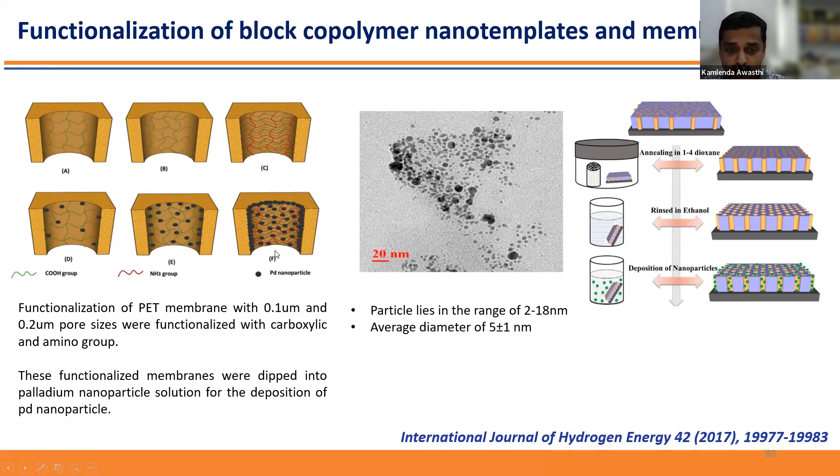Similarly, we tried this concept in block copolymer nanotemplates. We used the same strategy: carboxylic, then amine, then we bound this palladium nanoparticle. So when we have both layers - supporting layer also with palladium and upper layer also with palladium - here you can see the selectivity of gases increases drastically up to 48 hours. And here you can see the template, and the white part, if you can visualize it on screen, these are the palladium nanoparticles around this block copolymer nanotemplates.

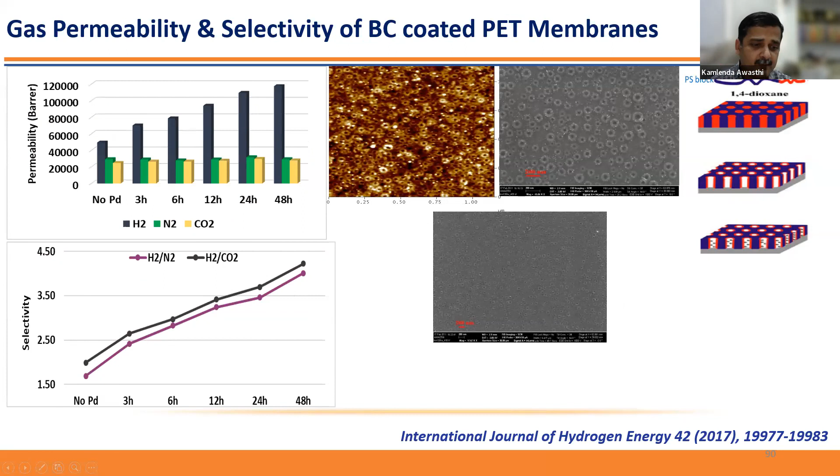So in conclusion, we use our membrane in hydrogen separation. These may be advanced polymeric membranes, or modified membranes with optimized parameters.

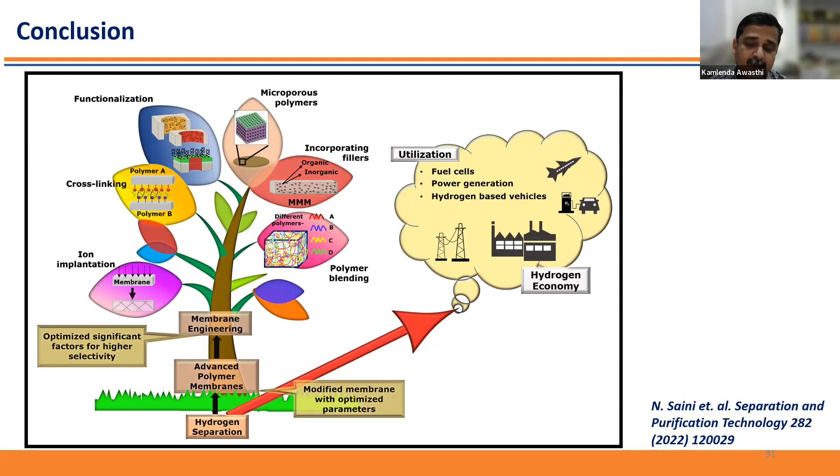These may use ion implantation, cross-linking, functionalization, microporous polymer. We can use different fillers that are gas sensitive, and we can certainly use this kind of membrane for fuel cell applications, particularly to capture the hydrogen so that other gases go out, so we can make a hydrogen selective membrane.

So in conclusion, functionalization of the membrane and nano templates help control permeability and selectivity. This composite membrane with oriented pores can also help control permeability and selectivity, so both can be improved. Generally, when talking about polymer membranes, there is a trade-off relation, meaning once we increase permeability, the other goes down.

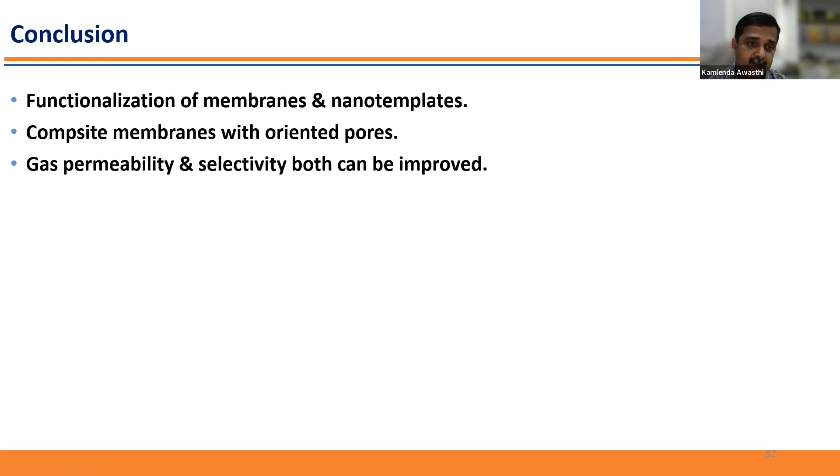So both can be improved. I want to acknowledge my mentors from whom I have learned this process: Professor Y.K. Vijay from University of Rajasthan, Jaipur, Professor Ashutosh Sharma from IIT Kanpur, Professor Manfred Stamm from Dresden, Germany. We tried to learn different membrane applications, and we collaborated on membranes with Professor Volker Abetz from University of Hamburg for block copolymers, Professor Myung-Han Yoon for composite membranes.

Particularly in case of conjugate polymers, Dr. Vaibhav Kulshrestha in Bhavnagar. The work I have presented is from Dr. Rajesh, Dr. Kamakshi, and Ms. Michelle Saini. For the whole work, we could get funding from different sources: DST, Inspire, SERB, IUC, and Humboldt Foundation.

I'm happy to answer your queries, please.